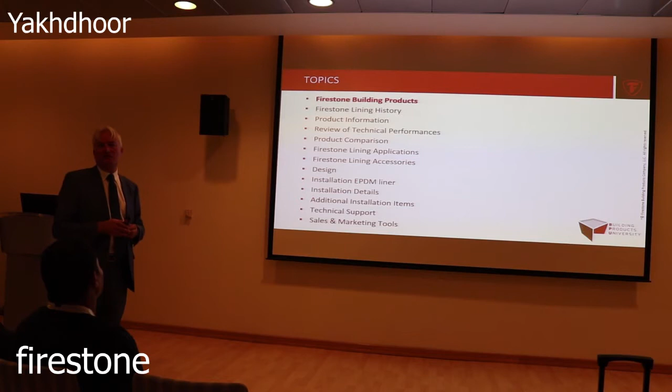So I can be here 1 hour, 2 hours, 3 hours, but we already have a 30 minute delay. So I will give you a brief introduction on the company, and show you a little bit the type of projects that we are doing. Then afterwards, if you wish, we can have a personal discussion, today or later on.

So Firestone, perhaps some people know the name already. It is actually an American-based tire company, and this is Mr. Firestone, so it's a family business. It started in 1900. This is Mr. Firestone, and here we have Henry Ford, who made the first T model. So he was building the cars, and Mr. Firestone was making the tires. That's how they went together.

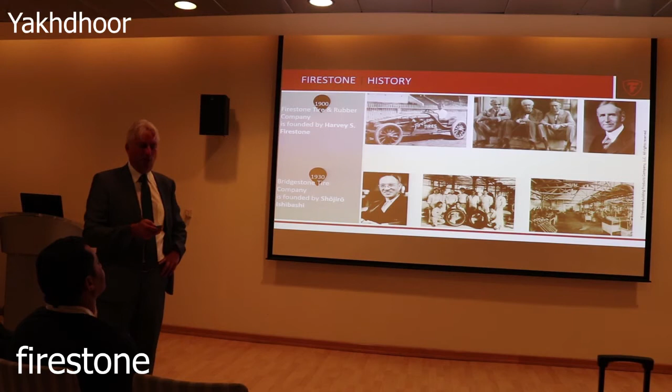Then in 1930, the Ishibashi family in Japan founded Bridgestone Corporation, which is as well a tire manufacturer. In '88, '89, Firestone and Bridgestone went together, so now it is one company under the umbrella of Bridgestone. But you have the Firestone brand mainly in USA, and Bridgestone in Japan, Europe, and all the other countries.

So our mother company is actually Japanese, and we are reporting directly to Bridgestone Americas in Tennessee, in Nashville. This is my division, the building products, over here. Then they have other activities. It's a big group, 140,000 people worldwide.

I think for the last fiscal year we will do about $35 billion as a group. With regards to the building products, my division, we are almost 2,000 people, and we are doing about $2 billion turnover.

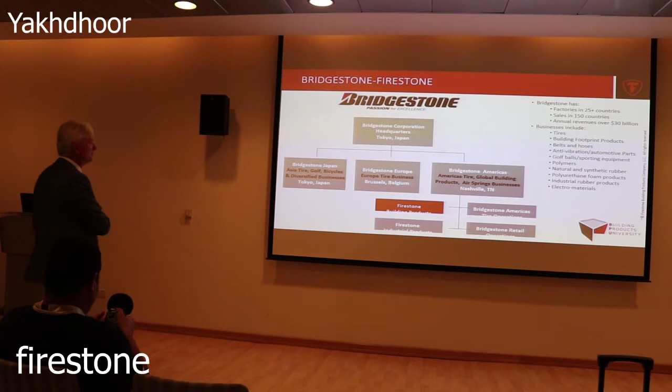This is how we are organized. So our headquarters is in the USA, in Nashville, and I myself am based in Brussels, in Europe, in Belgium. Brussels is actually responsible for Europe, Middle East, and Africa.

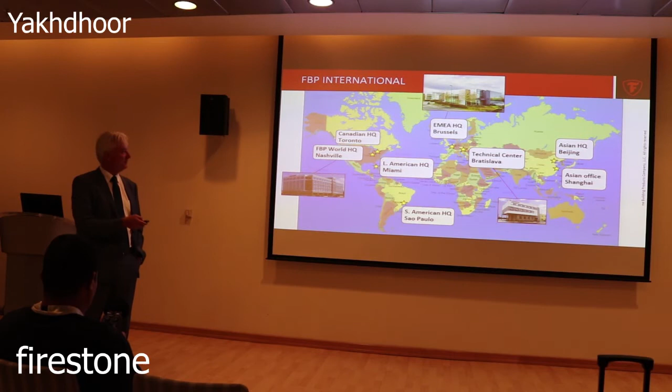The products that I will present to you are principally made in this plant, which is in Arkansas, in Prescott, and it's the biggest EPDM facility worldwide. They have a production capacity of 80 million square meters of EPDM per year. We have other products as well.

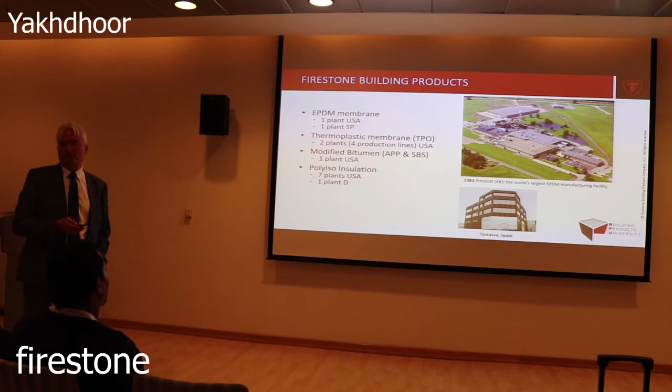This is more for the building side, for the roofing. We have some bitumen, and for the roofing side, we are the biggest insulation manufacturer in the world. We are producing 80 million square meters as well.

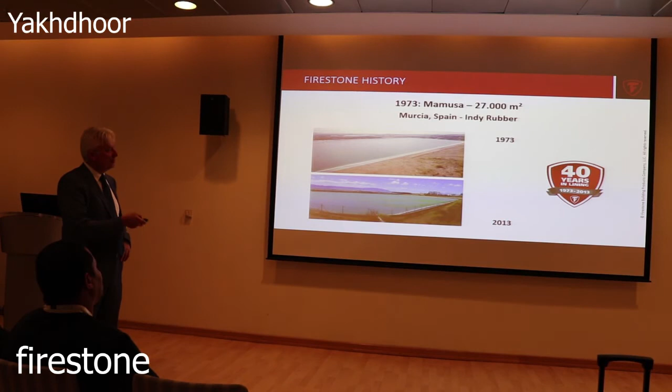Alright, so this is the part that you are interested in. It all started with our first project, which was based in Spain, this reservoir here. It was built in '73, so we are already 45 years worldwide into this business. This is a water reservoir. This picture was taken in 2013, and the original membrane is still in good shape.

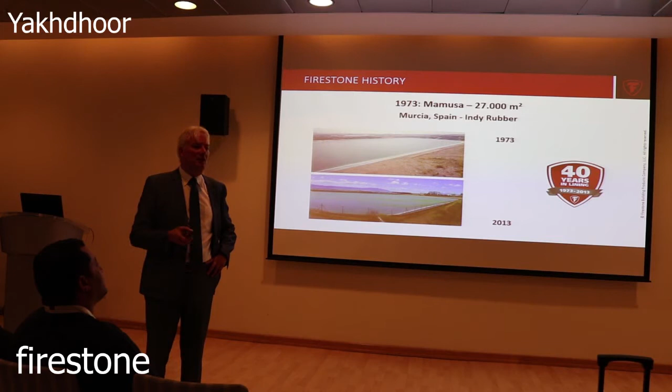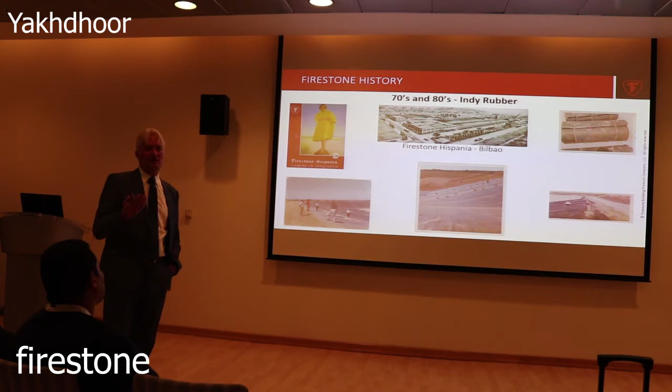So if people here want to see it, I can invite you, you can come with me, and we can see it in Spain as it is. In the 70s and 80s, we bought a company named Indy Rubber in Spain, and that's where those types of products were produced. It was not EPDM yet, but some kind of butyl, as they call it, so some kind of in-between.

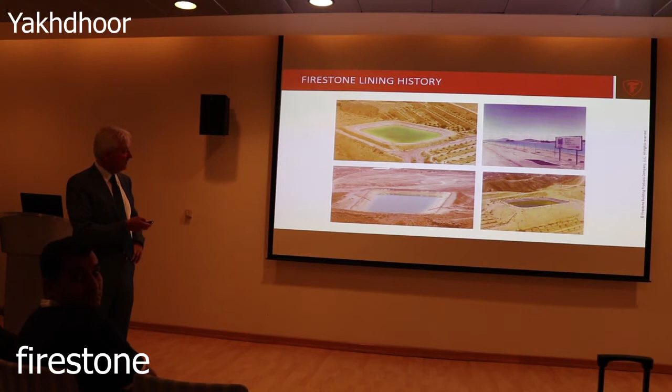Those are the projects that we made in Spain, actually water reservoirs that can be used for irrigation. The first canal that we made was in Sicily, in Italy, in '89. So you see here how it is done.

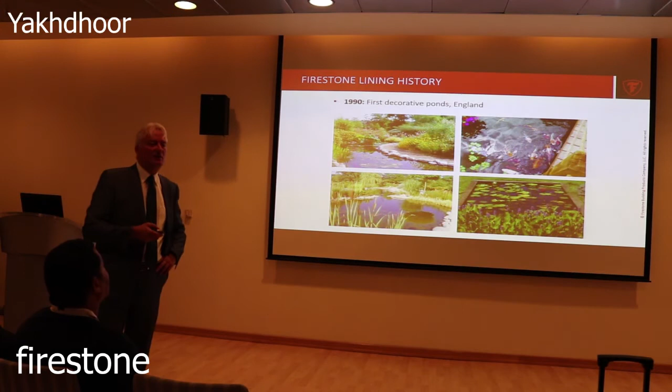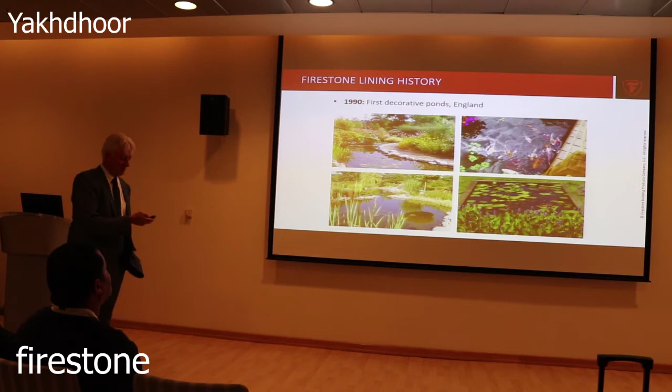And in the 90s, we started producing EPDM for what we call decorative ponds. So in Europe, a lot of private people in their garden have this type of little pond where they have fish or plants. This is a very big business in Europe.

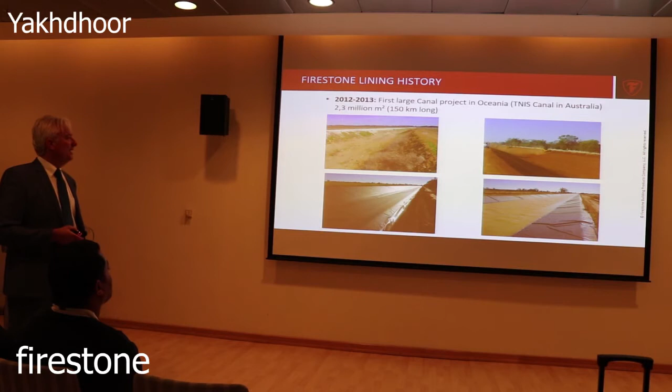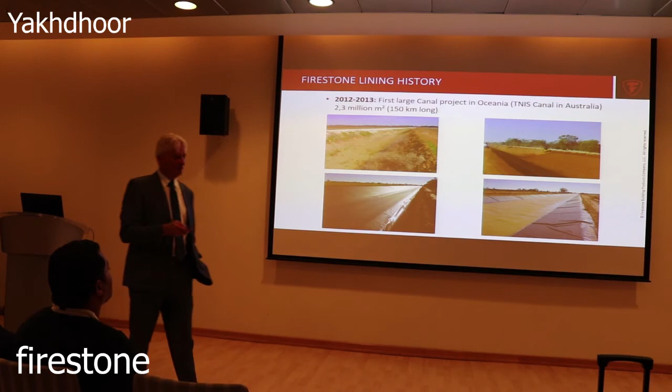Another application is country clubs and golf courses. And this is a very big project that we did in Australia some years ago. It was 150 kilometers long, a canal connecting different farms for irrigation. I have a little movie, I will show it afterwards after the presentation.

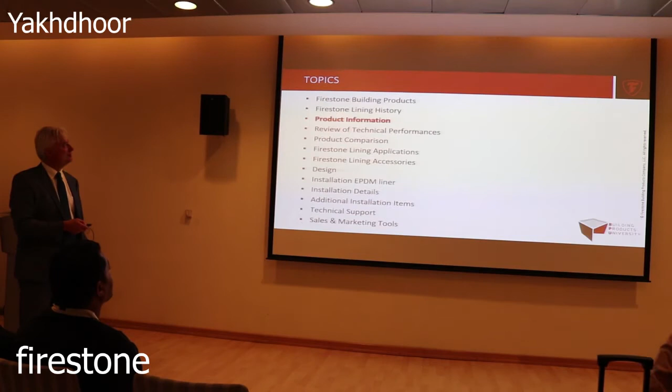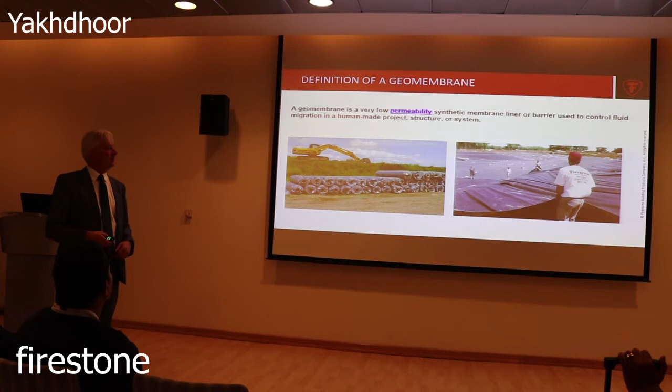And today we have already installed 185 million square meters of membranes in all different applications. So we are talking about the geomembrane. What is actually the aim of what we are doing is that we try not to waste water. Our membranes are synthetic and have low permeability, meaning that if you catch the water, it will not go into the soil. This is basically it.

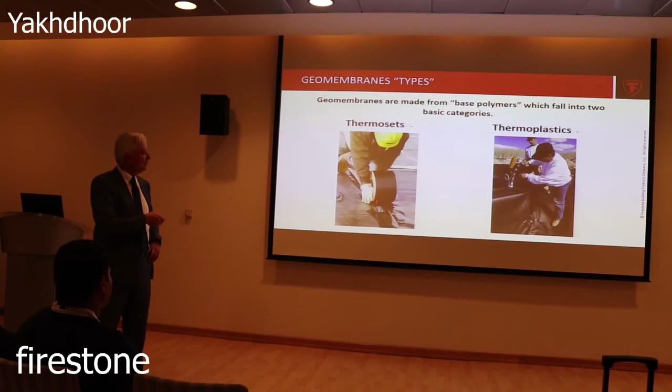We have two categories, which is very important because a lot of different producers are producing different products for the same application. We have thermosets, which is our type of EPDM membrane, and we have thermoplastics. What is the difference? A thermoplastic, those are products like PVC, HDPE, low density polyethylene, etc.

When you heat up the product, it will become liquid. And if you are putting the membranes together, you need to have a hot air type of machine with electricity to weld it together. This is the typical way that they are doing it with thermoplastics.

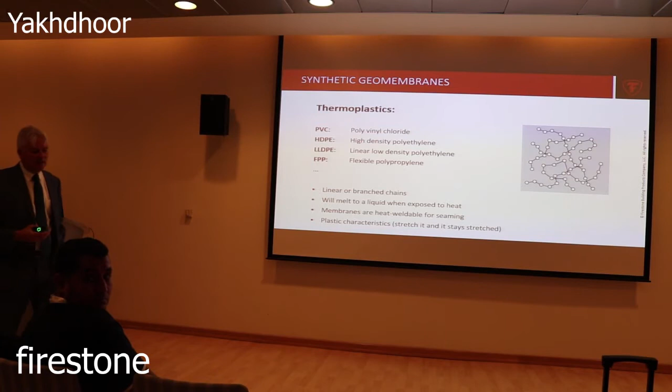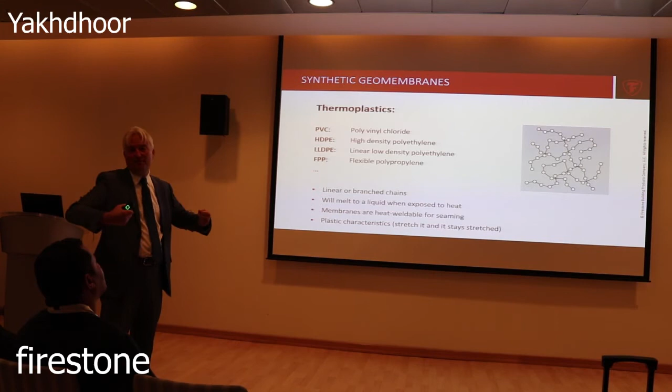Now, the negative thing about thermoplastics is that they have a certain elongation, but if you stretch them, they do not come back to the original form. This means that due to temperature differences, after some time, you will see some waving because they expand but cannot go back. With the EPDM, you have a very long elongation, meaning you can stretch it and it will come back to the original form, so you don't have those waving effects.

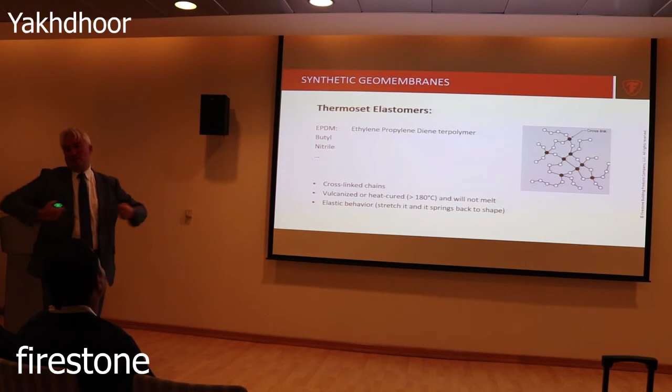So this is the thermoset elastomer, EPDM. What is typical is before we supply the membranes to the market, we cure it. We put it into an oven at a temperature of about 180 degrees to vulcanize it. Afterwards, when the material gets out of the oven, it stays inert, so it's very good for temperature differences and can withstand a lot. It has an elastic behavior, so you stretch it and it comes back into the original shape. You can stretch it too much, but then it breaks. You have to be very strong already before you can break this type of membrane.

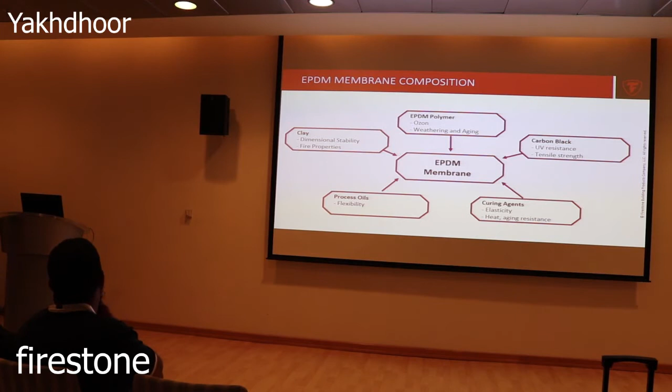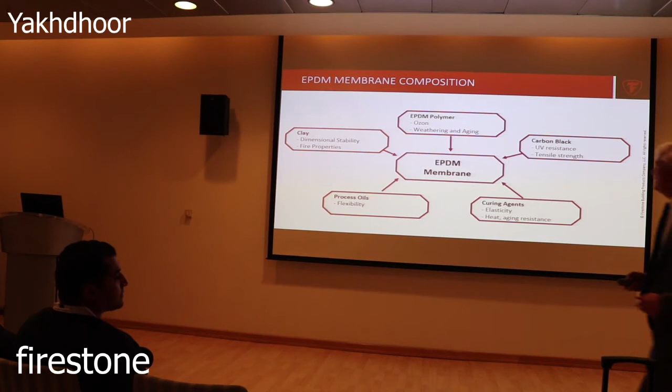What is into this type of membrane? This is actually what we are talking about, this is the type of membrane that you see here. Show it to the other people as well. You can try to stretch it, but the polymer at the beginning is white, and you will see it has a black color. Why is that? Because there is a lot of carbon black.

In our products, we have more than 25% additive carbon black, and this is very good for UV resistance. So it is black because of the carbon black in the product, and it absorbs the UV radiation and transforms it into heat that goes out of the membrane.

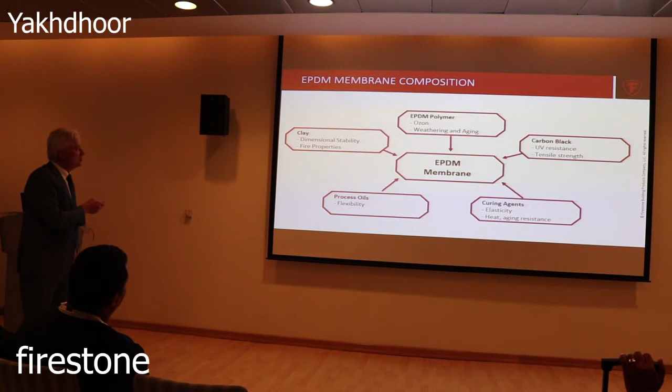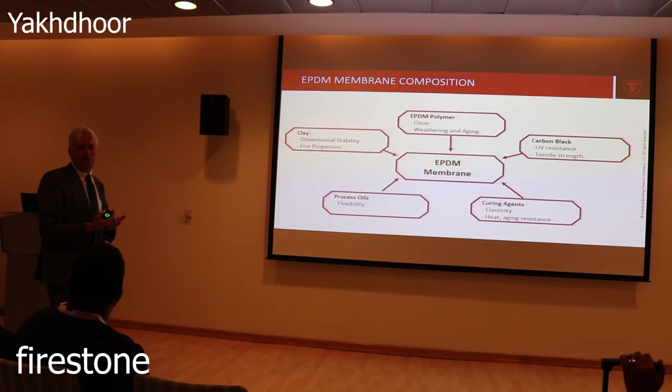We have the polymer, this is good for the weathering and aging resistance. We have some clay for dimensional stability. We have some process oils for the flexibility, and curing agents. This makes one compound, or basic compound, for this type of membrane.

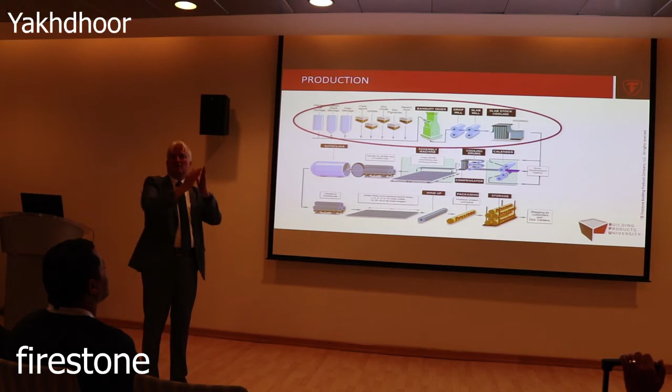This is the production process. I will not go really into details, but all the different elements are put together and go through a mixer. Then we have stock slabs, and we go through a calender. So there are two membranes coming from here that are going through this calender, and in the calender they will readjust the thickness of the membrane. So you have two sheets going through the calender and become one.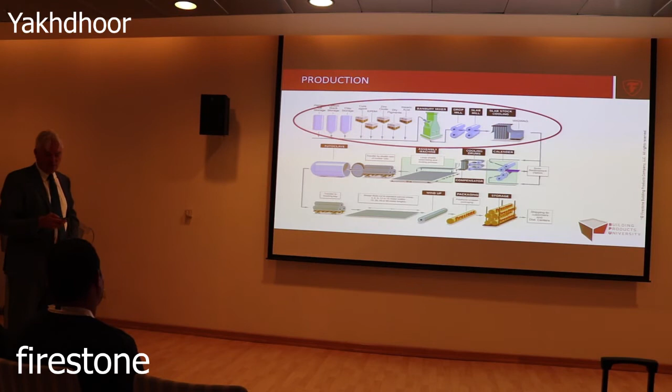Then, this is very important: here the width of the sheets is 3 meters, and we have what we call the assembling into our production plant. So here we have 3 meters by 15 meters, and we make very, very big sheets out of it. Those are the mother sheets, and then those go into the oven for curing at 180 degrees. It comes out, then we cut the mother membranes into different sizes, we roll it, and it is supplied to the market.

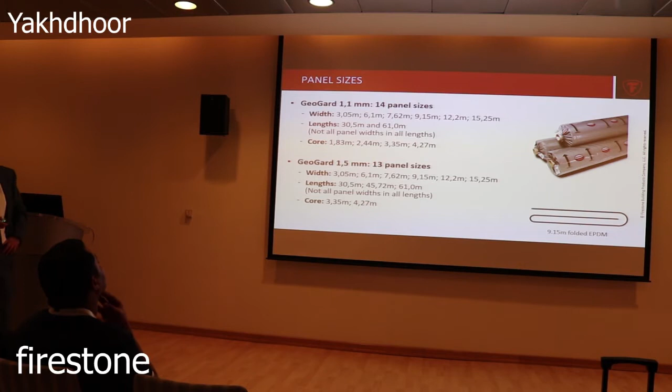So yeah, this is a little bit more into detail, but for the first product range we have GeoGard, which is for the more technical applications. We have two thicknesses, 1.1 millimeter and 1.5 millimeter. Now we have a top quality product.

A lot of, if you look at bitumen or other type of products, they will offer you 4 or 5 millimeter thickness. Okay, we don't need that. We can have better performance with less thick material. We can have different widths from 3 meter to 15 meter because we assemble the products into the company, and we have two lengths, 30 and 61 meter.

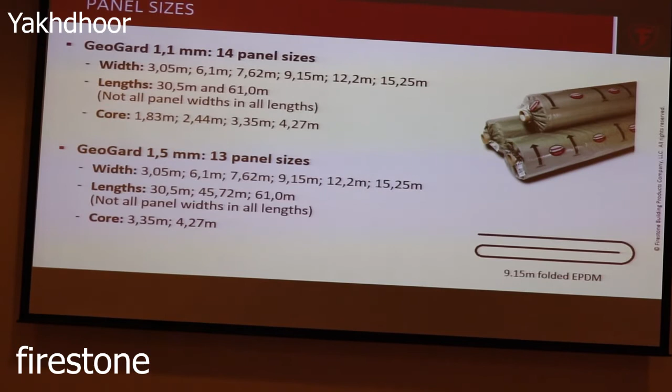This means that we can supply to the market very big sheets of 60 meter long by 15 meter wide in one piece, so we go very fast when we do the installation if we have very big surfaces to cover. This is one of the main advantages.

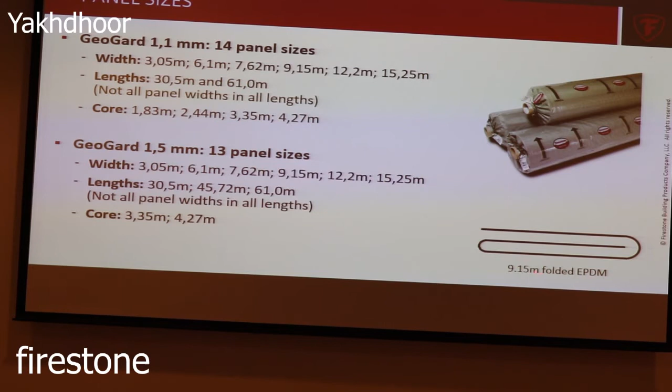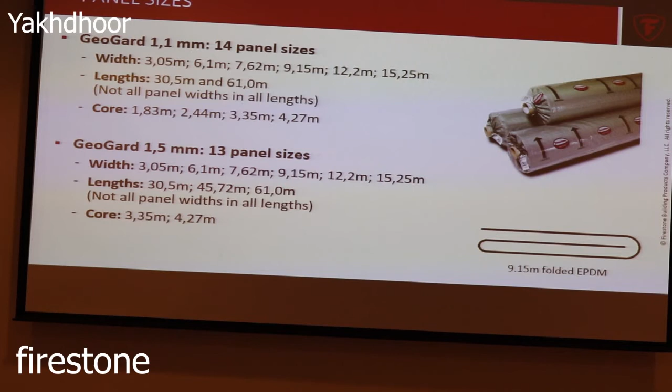Now the core is always 3 meter wide because we need to transport it, and what we do is if you have 9 meter, we have 3 layers. We pack it in 3 layers, we bring it to the site, and then you just open it. Quite easy, and you roll it out.

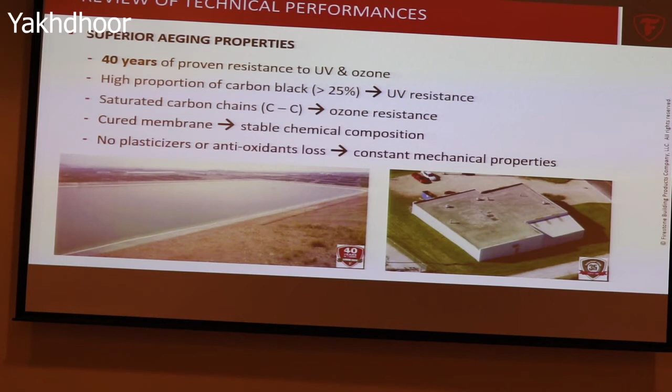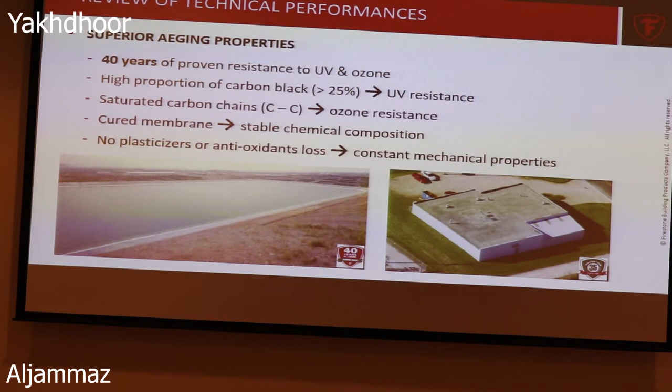On technical performance, due to the carbon black, we have very good aging properties, good UV resistance, and ozone resistance - so a combination of water and oxygen resistance. It's chemically stable, so nothing comes out of the membrane even after 30 years. There are no plasticizers or other products that can be toxic for the environment, and this is very important.

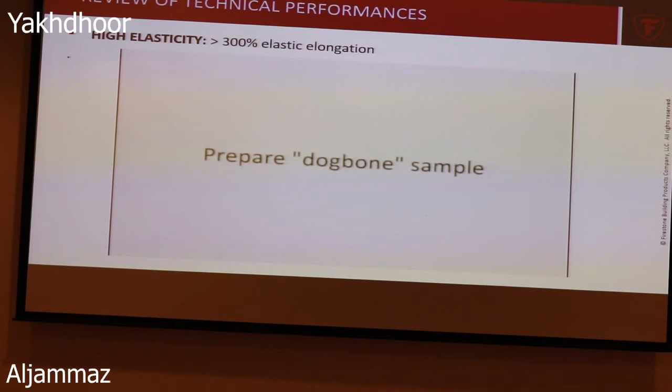What is this? Oh, I'm blocked. What is happening? Let me see. Yeah, well, I clicked on something. Okay.

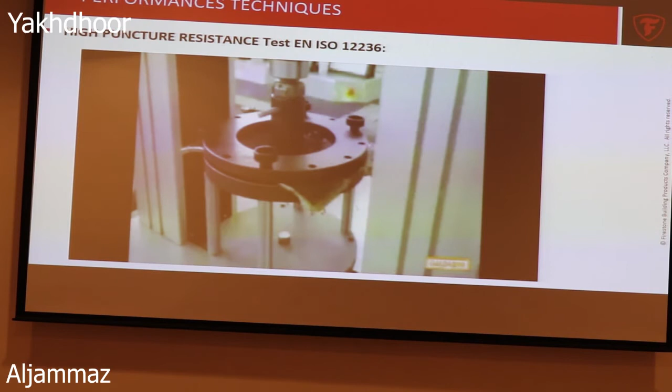Our membranes have a very high puncture resistance. Normally you have to well prepare the soil, but sometimes you have stones in it, and actually our membrane will take the form ultimately of the stone. It will not puncture - of course, if the stones are too sharp, you have to be very careful. But we have test results, and those tests are very good.

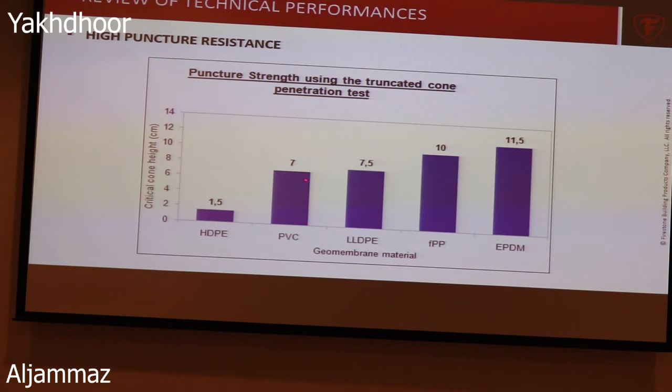Here you see that EPDM, as a geomembrane, has the biggest resistance to puncture compared to HDPE or PVC. So this is breaking much easier than the EPDM membrane.

Another thing is that we can provide you with very big sheets, meaning we need less to cover the same surface. We have fewer seams, with less risk of problems.

It's a simple seaming process. We use a kind of tape in between, and a primer, which is a chemical activator, and we put this between two sheets. The longer the sheets stay together, the better the bond becomes - so even after 20 years, the bonding is even better than at the beginning.

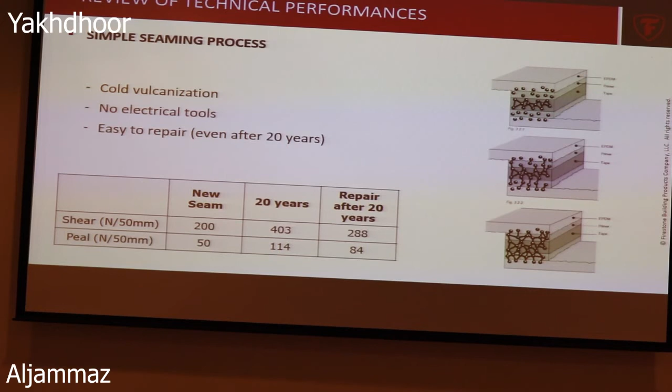So we don't need electrical tools, and it's very easy to repair. It's like before, when you had a bicycle and broke it - you can just patch it. So it's very easy, you don't have to start cutting. It's like a patch - you patch it on there, and it's fixed in 10-15 minutes.

It's environmentally friendly. Here as well, studies have demonstrated that the impact of EPDM through the life cycle is quite minimal, much less than PVC or other materials.

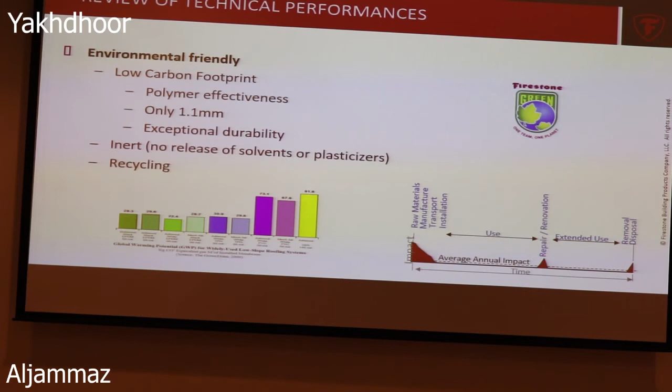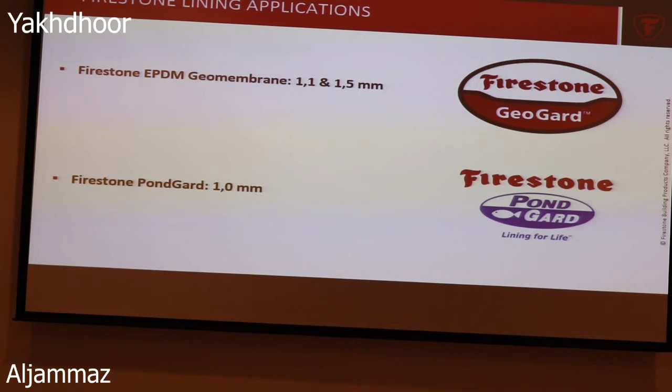So what are the types of projects we are doing worldwide? We have two brands or ranges: GeoGard and PondGard. GeoGard comes in 1.1 and 1.5 millimeter, more for technical types of projects, and PondGard is 1 millimeter, more for fish ponds, etc.

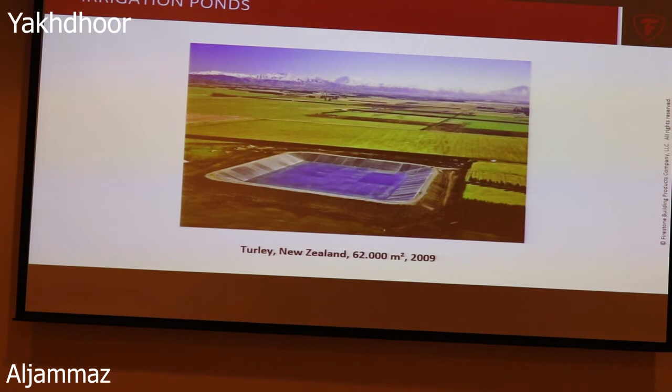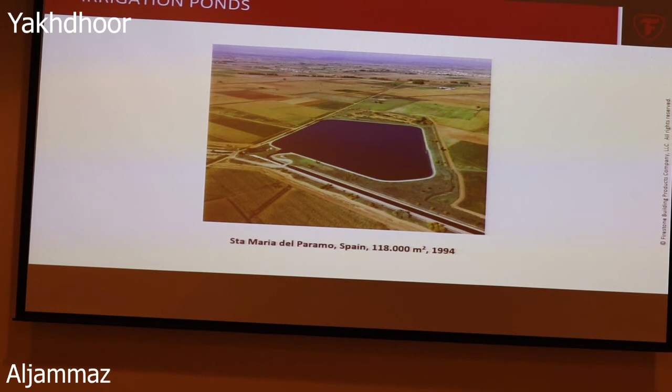On GeoGard we have worldwide 11 types of applications that we do a lot. The biggest part is irrigation ponds - we capture the water, and it stays in the pond until needed for the fields or crops. This is in New Zealand, 62,000 square meters. This is one in Spain, 118,000. So they are very big ponds.

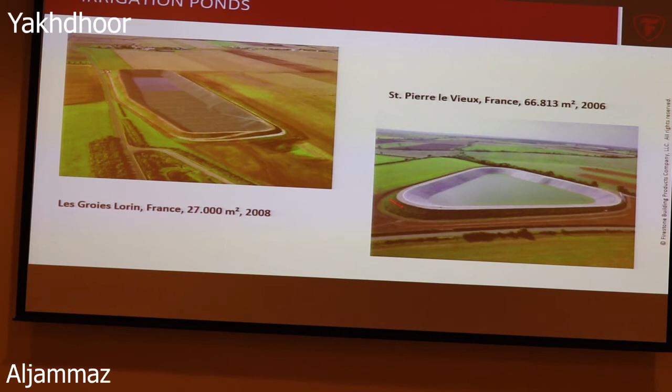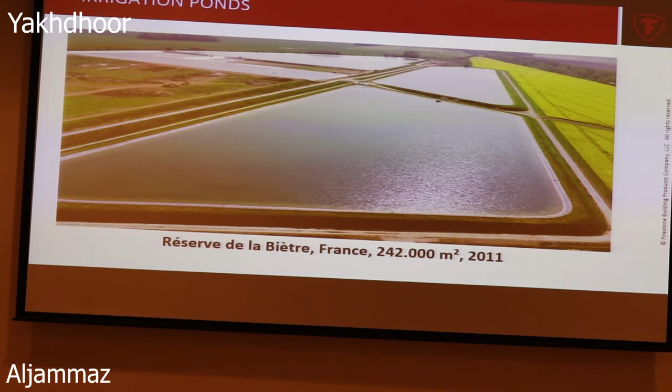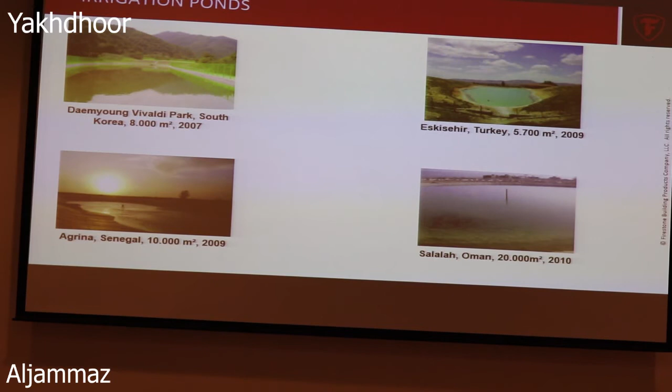One in France, a smaller one, with different shapes as you see here. Those are two projects we've done in France again. Another one is very big, 240,000 square meters. We have one in Oman, Senegal in Africa, Turkey, South Korea - so we are doing this type of application throughout the world.

Aquaculture is something that's really getting very big. We have very big projects in Southeast Asia. I'm working now in the Emirates on a project for shrimp, and we have a lot of fish farming as well. We have certificates that our membranes are non-toxic for aquaculture life. It can also be used for algae production, and different types of fish can be put in there.

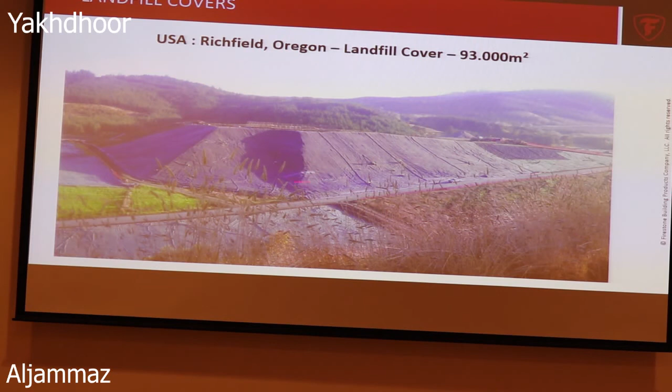So perhaps this is also a future application for your country here. Some examples can be big - you see 93,000 square meters, all covered with our membrane.

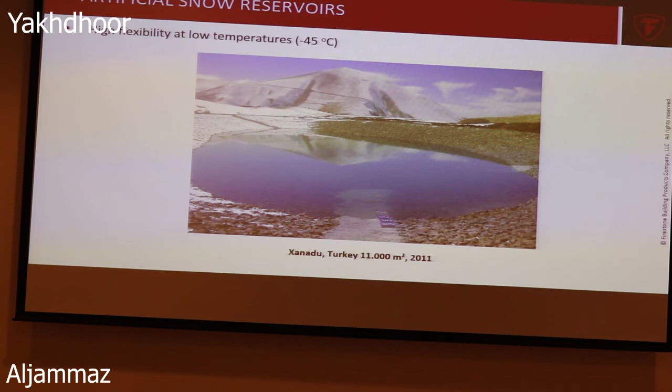Artificial snow reservoirs - you don't have this here in Saudi Arabia, but what happens is the snow in summertime, when it melts, becomes water, and they capture the water that is used for the animals or whatever. But this you don't have.

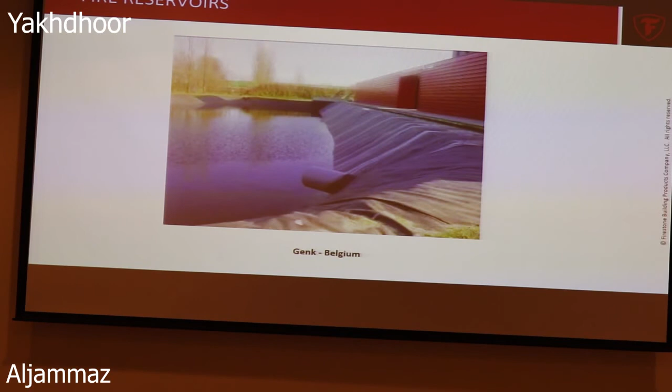This is important in cities, or if you have manufacturing plants. If there is a fire, you need water, and in a lot of countries now they are making these big water reservoirs obligatory so that they can take the water if something happens with the plant.

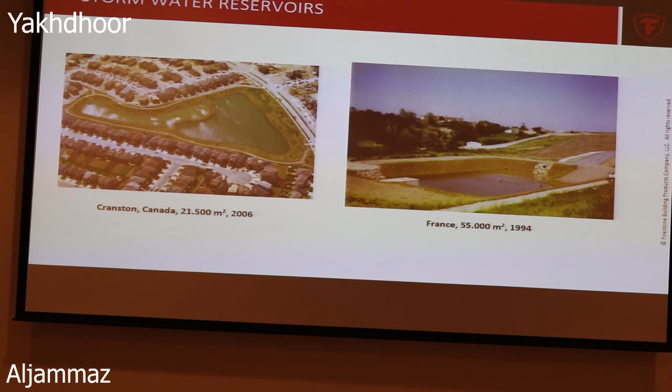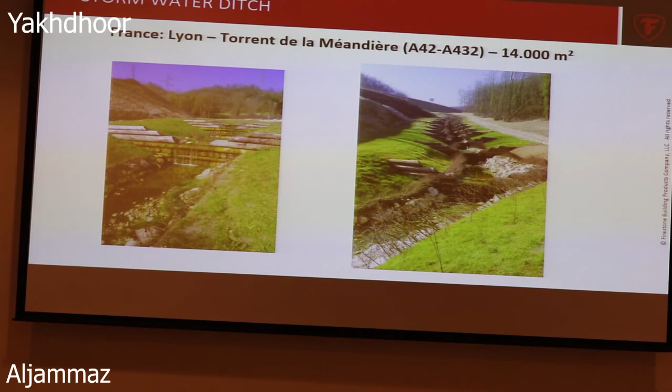Then we have the stormwater reservoirs. Those are reservoirs that capture the overflow and make sure that people don't have all the water coming into the houses. Sometimes underneath, that's where the water is captured as well. This is the same principle - ditches.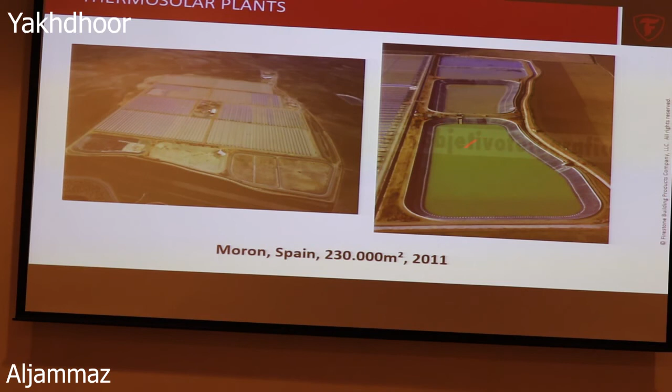This is an application that is being used more and more. In a lot of countries now they are using wind energy and solar energy, putting up very big solar plants. There is a system to cool down as well, and this cooling system uses water coming from those big reservoirs. There is a recycling process going through the system for cooling off the thermal plants, and then the warm water goes back and is cooled off again.

Hydroelectric power plants, we have already discussed this. And yes, there are other applications, artificial lakes, parks for children, whatever. You have this type of water features, as we call it.

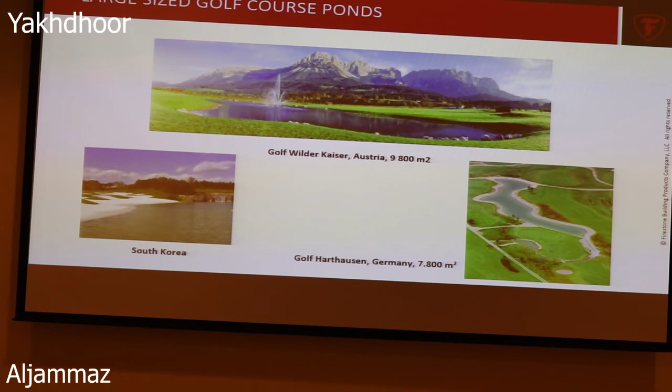product range for Firestone is golf courses. So every time you have this special form, not a rectangular shape, our products are very fit for it because it's elastic and it adapts to the surrounding. You see here these special shapes, and this is a very good application for our product.

So GeoGard, this is for the more technical applications, and then we have the PondGard. It's a 1 millimeter product, and this is more for, I would say, household and private applications.

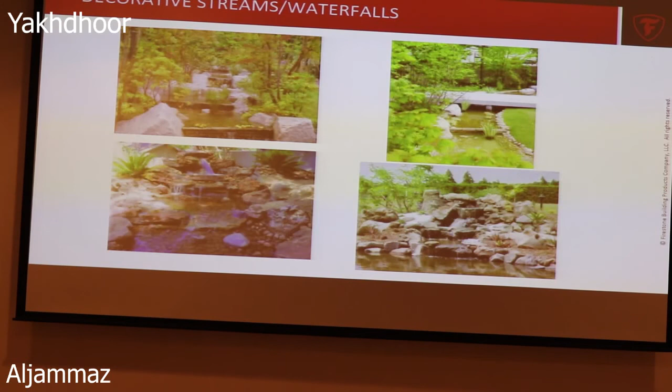This is again something typical for Europe. In Europe, all the people have this, the gardens, private gardens, and they put little ponds into it.

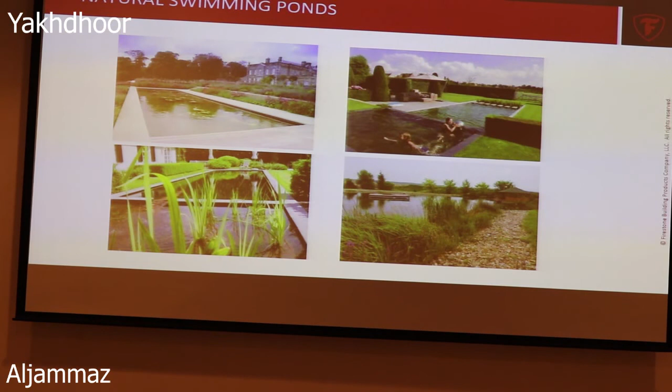Little waterfalls. And what we have in Europe as well is that instead of using chemicals for the filtering of swimming pools, they do it with natural type of filtering systems, with plants or with biofilters. And this is used as well as a swimming pond, not a swimming pool. A swimming pool you use chlorine, yes. This is with the natural filters.

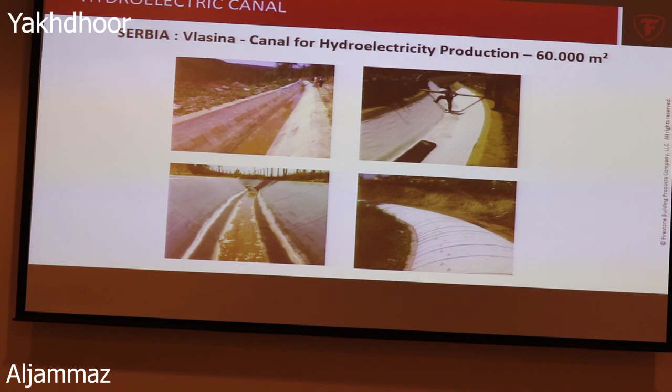Now, something very important from Firestone is that we provide a lot of training, because we have a very good system. We have the membranes, but we have everything, the bonding adhesive, the primers to put together. Of course, it is very important for the owners of the project that they have a very good and long warranty, and for this we are giving the applicators training.

We can give it here in Saudi Arabia. We are setting up a training center in Dubai. We have training centers in Brussels, and the people can come and have some practical training for the finishing of the different products. And after the training, you have a certification.

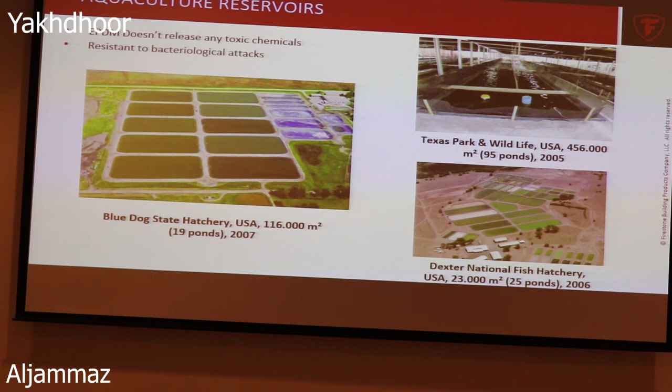Second thing is that we have our engineers. If there is a big project or a complicated project, they come at the beginning of the project to help the applicators start it up. Then at the middle of the project we come again, and at the end of the project we make a full overview of what needs to be done, if everything is okay, to give you the warranty on the project.

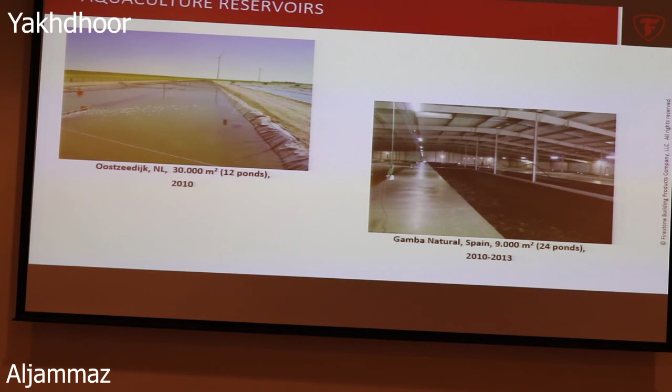Depending on the project, warranty can go from standard 10 years to 20, 30 years or even more, depending on the product that you are using.

Okay, all plants are ISO certified. We have the ISO 9000, but we have as well the 14000 for environment.

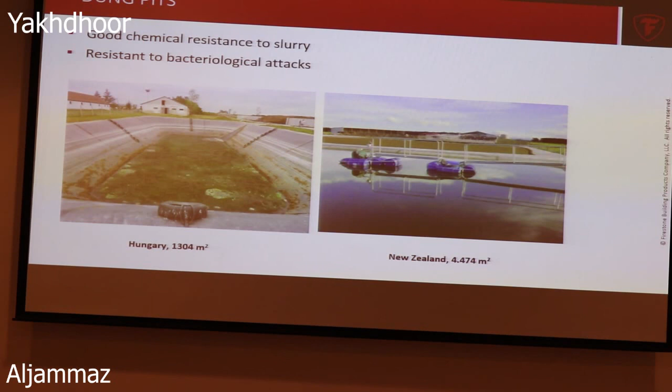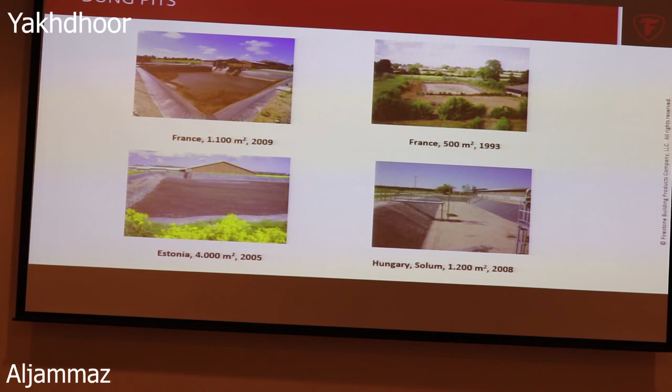We have all the information available as well on our different type of projects that we have done, and for the installers we do the full calculation. So we get the information from the design or architects or the landscaping architects, and we calculate everything that is needed to start up the project.

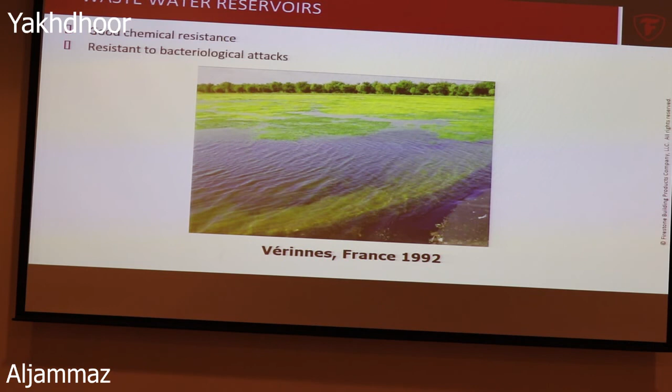Okay, and then at the end we have the certification of the warranty. This is a materials warranty or a system warranty. Depending on what the thickness is that you are using, it can be 10 years or more.

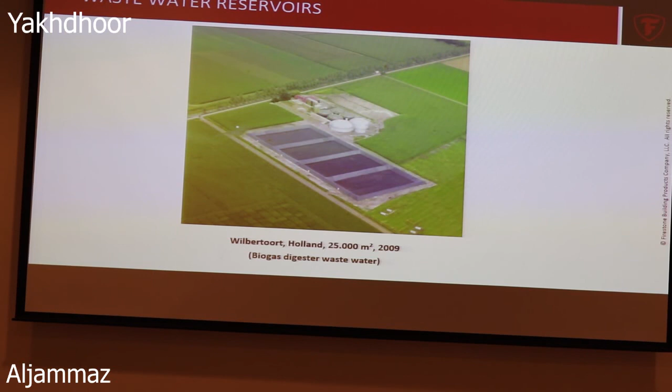And okay, Firestone, Bridgestone, if we give you a warranty or the end customer gets the warranty, this is really serious. We have been there for 45 years already in the lining business, and we will be there for another 50 years. So whenever you have a problem after 20, 30 or 40 years, we will be there to give you the support to fix it. This is why we are giving those official warranty documents.

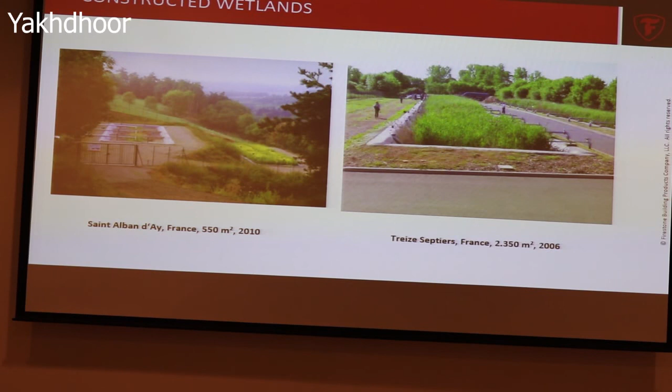This was a very small introduction. I will show you, to finalize very quickly, a little movie of a big project that we have done for an irrigation scheme in Australia. In Australia, the government gives to the farmers certain financial incentives